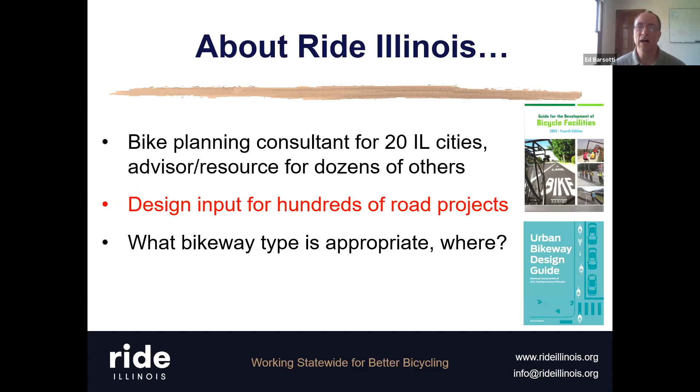So one of our specialties is determining what type of bikeway is appropriate where. That includes, when you're going to do a road project, how might bikes be accommodated? Some general thoughts on this webinar.

First of all, a lot of people who don't bike much will think about trails naturally - off-road trails on their own rights of way. When they think about biking, they think about trails, and it gets a lot of attention. But most biking still occurs on roadways, and that topic doesn't get as much attention. So that is, in fact, our members' number one priority: for us to try to fill that gap, work with agencies, work with consultants and so on to try to get our roads a little more bike-friendly.

So what this webinar will go through is our process of how we advocate for this, as well as maybe 15 or 16 different example requests covering a range of topics to show you what might be possible when you design your roadway project. We are meant to be a resource for towns, advocates, and consultants as well. Already I talked with 3 different attendees from last week about some projects they're working on, and I invite you to contact us after this one as well.

So the way we're going to do this - accommodating bikes in road designs - there are a couple of different factors. One is policy: is there a good policy in place? Is there a commitment by that agency to accommodate bikes and peds as well? And are there good details on the design standards? So how it is done is important as well.

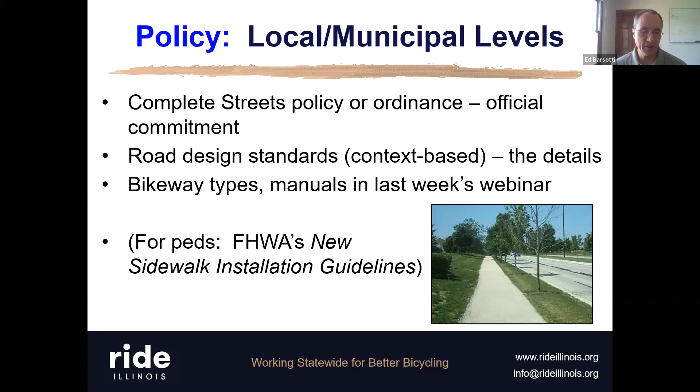And then I threw out a point for those interested in pedestrian issues. The Federal Highway Administration actually has a table called New Sidewalk Installation Guidelines, in which it recommends sidewalks on either one or two sides of the street, or just paved shoulders, depending on the context of a roadway. So I would recommend, if you're interested in that issue and you're with the town, to just Google FHWA's New Sidewalk Installation Guidelines and you'll find it.

Also at the local level, in addition to making a commitment and adopting roadway design standards, a couple of different policies include a bicycle or bike-ped plan that is meant to say we want to retrofit our community in this way. So a bike plan, which we'll discuss next week in a lot more detail, will indicate what roads are preferred for inclusion in a bike network in a town and how to go about doing that. Having an adopted bike plan also helps you win state and federal grants that are out there, and again we'll talk about grants next week as well.

Another policy that a town can do, which is separate from complete streets, is to have a separate budgetary line item for retrofits and for matching some of the grants that you might be able to get.

So an example is in Rockford. I'm currently finishing up a bike plan in Rockford where they have a complete streets policy in place. When a road project comes up, they automatically look at how they can improve things for bikes and peds. But at the same time, they recently bumped up a line item to $300,000 per year to go back to places in town that are not going to be where road projects occur in the next few years, but a retrofit needs to occur more quickly, earlier than that. Using this line item budget, they will go through and implement their bike plan, retrofitting those places that are not scheduled for improvement in the next few years.

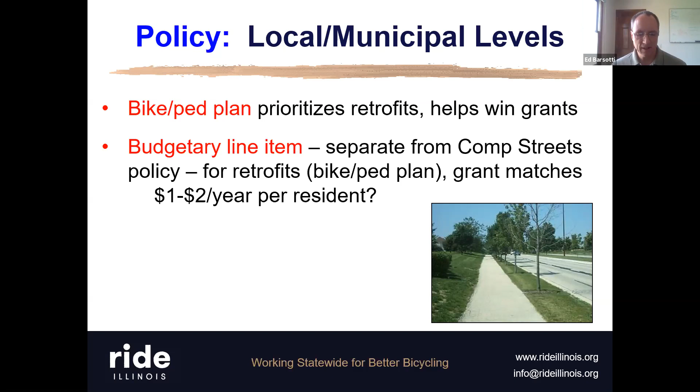My estimate on what's an appropriate amount for that line item is $1 to $2 per year per resident, and Rockford used the $2 per year per resident figure in getting their $300,000 total.

At the county DOT level, so many of the metro areas around Illinois, county roads are important for being able to get around, especially in suburban type development. We found that to be the case in several places around the state.

So back maybe 9 years ago, we did a survey of the different policies that the county DOTs have. Last year, we redid that survey for the Chicagoland counties only. What we found is that almost all of the counties are really in the last 15 years making progress on the issue of bike ped accommodation. They've adopted formal policies. They have one of their staff members look at each individual project with that perspective.

How can we accommodate bikes and peds? The counties that have adopted these policies, when there is an off-road accommodation, a sidewalk or a trail alongside of the road, that county will either pay some, most, or all of the cost for those off-road facilities. Will County, unfortunately, is the lone holdout on this topic, but we're seeing good progress around the state.

A few slides on the state level. IDOT has, for those who are advocates in particular and are not familiar, two different manuals that are really key to the accommodation policies. The Bureau of Design and Environment governs IDOT roadways, IDOT jurisdiction roadways. So when there's a state road project, they look at that manual, chapter 17, where you'll see a lot of the policies. I'll summarize those a bit in the next slides.

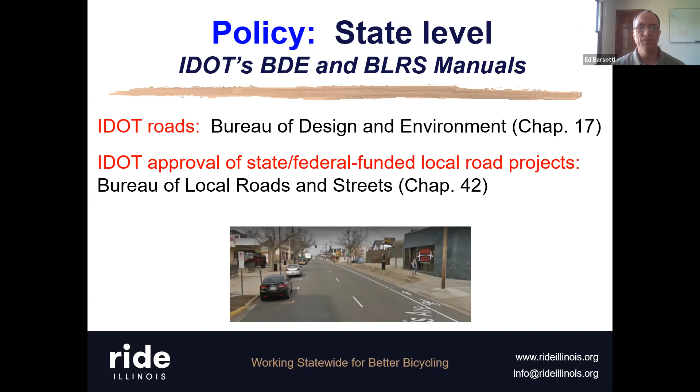Unfortunately, both of the manuals have badly lagged behind the national best practices and state of the art. But the good news is that, especially in the past year or so, they are catching up quite a bit. The BDE manual for state roads had their Chapter 17 entirely rewritten. Lots of great changes took effect last summer. And the BLRS manual, I'm actually on the committee that's rewriting the bike chapter for that, so hopefully that manual becomes more user-friendly, or more bike-friendly, within the next couple of months or so.

If you, as a town or as an advocate, come across times where IDOT may reject your suggestion or your design, it may be that what you're suggesting is already adopted by the Federal Highway Administration, but it just hasn't made its way into those IDOT manuals yet. In those cases, you can point to the federal manuals, the federal rules, and that should help you get your design approved.

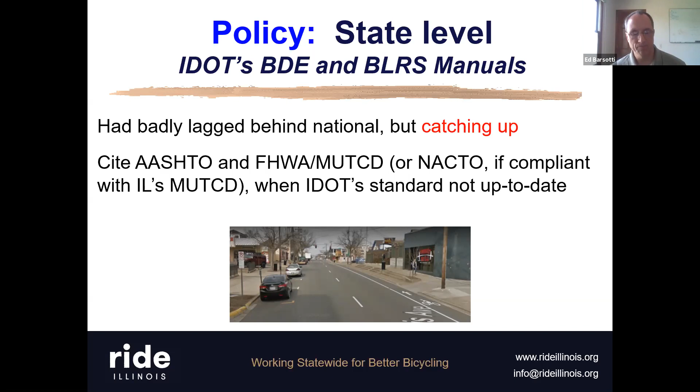So at the state level, for IDOT roads, back in 2007 there was a state complete streets law. That made its way into IDOT policy, IDOT design policy, in 2010. That law, that policy, is really only in effect for the major projects that IDOT does: a reconstruction of a roadway, an expansion, replacing a bridge, redoing an intersection. It's more than just your simple resurfacing projects.

The law focused on urban areas, but IDOT has actually expanded those policies to extend to other places around the state that meet certain warrants that they have. So maybe the main street in a rural town, the warrants will be met, and the complete streets policy that IDOT has will come into play.

Last year, as part of the rewrite of Chapter 17, IDOT adopted a new bikeway selection table, according to what is the speed, the traffic level, and so on. It used to be that table was primarily side paths, which is trails off the road, with bike lanes in a lot fewer situations. The new table has a lot more emphasis on on-road, but it does state that off-road side paths are an allowable option for most of these cases.

Something to be aware of in the IDOT policy is that if the primary recommendation can't be met, then the next highest and best is what can be implemented. Unfortunately, the policy doesn't include a lot of guidance on what that is. For example, when a side path couldn't be built, it was considered next highest and best simply to grade the grass next to the road level so a future trail could be added. There's a lot more that could be done in between those two extremes, and we'd be glad to work with anyone on that issue.

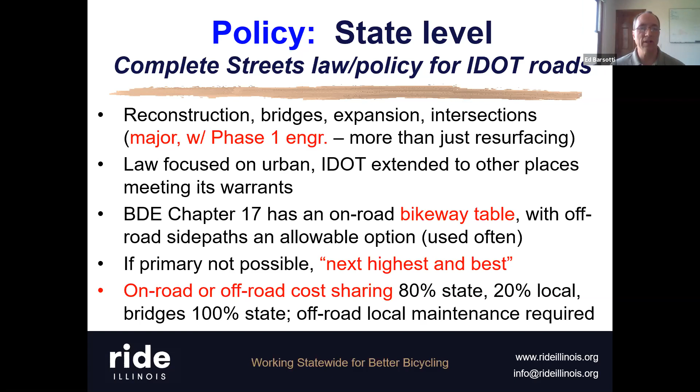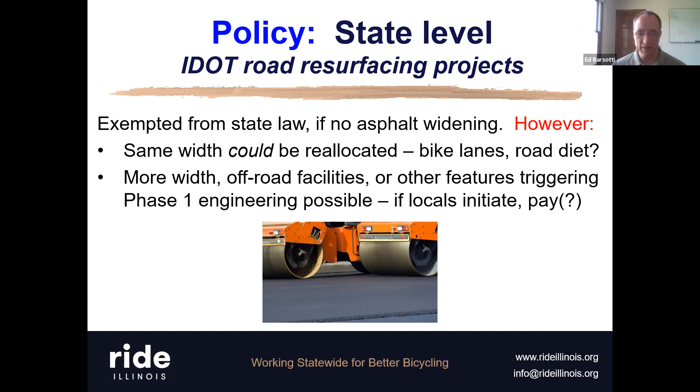Okay, so that's a quick look at the policy level. But even if you have a good policy at your town, county, or state, it's still important to get into the specifics for a particular location and roadway design that's coming up. That's something we've gotten involved with quite a bit.

First, we'll look at our retrofits—a separate project where we might hear from a local cyclist that there's a safety issue on a particular roadway. They'll let us know and ask if there's something we can do about it. If that's the case, we'll investigate: is something feasible for that location, and is it a justified request? We only want to make requests that we feel are reasonable.

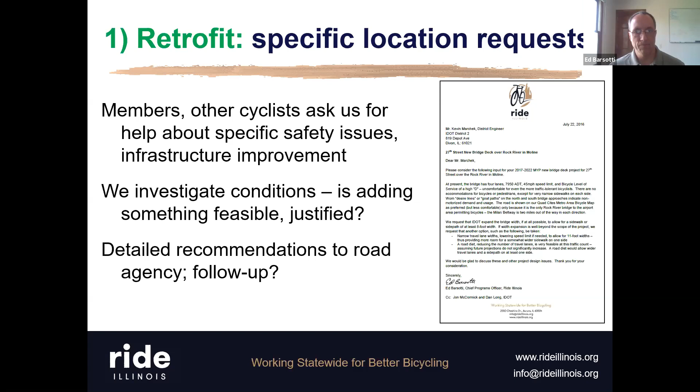If we find that it's something we want to request, we'll write up detailed recommendations to the road agency, and usually there's follow-up on that. I'd like to show you how we determine whether something rises to a priority level—some of the tools we use, which designers and advocates could also use to determine the need for accommodations.

The first tool, which I'll cover in the next couple of slides, is Strava, a phone app you can find online that shows a heat map of where cyclists ride. Additionally, there are traffic counts for motorized vehicular traffic, Google Map imagery to assess land use, local bike plans to see if a road is listed there but may not have come to the designer's attention, crash data, and local cyclist input. All of these factors help us decide whether a roadway makes sense for a request.

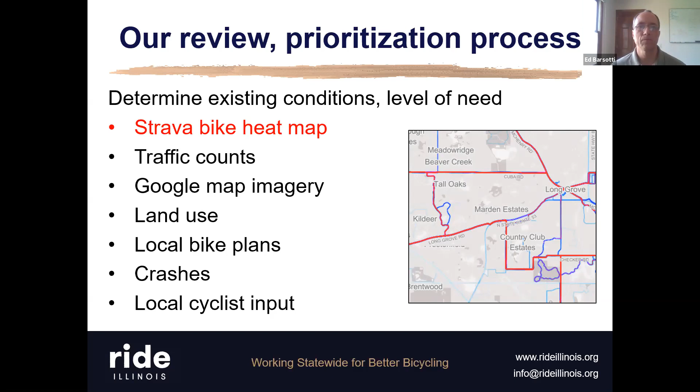So I mentioned Strava—it's a phone app that a subset of cyclists use to track their bike trips. On the website, you can look anywhere in the world to see where local cyclists ride. I use it when I travel to find good routes to check out a town, but as a planning tool it's very helpful to know where there's more demand. The online version is rough, but you can tell relative demand levels. If you want more detailed data—time of day, direction cyclists are going, exact counts—that can be purchased from Strava. I hear it's very expensive; I know Cook County has purchased it.

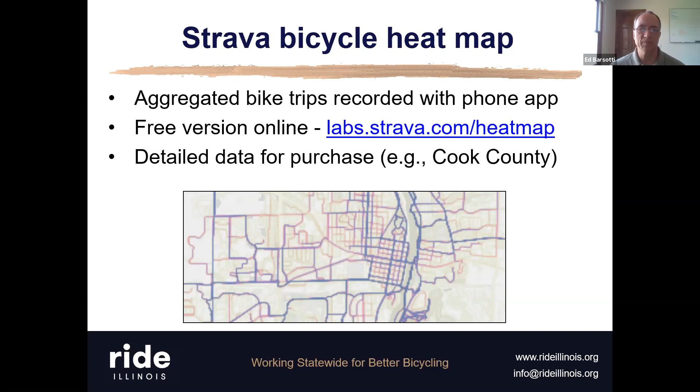Some of the pros and cons regarding Strava. Again, the free version is a relative level, so you're able to get a rough idea of what roads are more important than others for bikes. So when you don't have anything else to go on, Strava is a good first step.

Some of the negatives: it's primarily for your more club-level riders. People who are more casual cyclists, or who use their bike out of necessity to get to their jobs, usually aren't tracking their trips on Strava. So you get only a subset of the community, but it's still very helpful. Half of the trips Strava records are, in fact, commute trips, they have found. So it's a useful tool.

If I could interject real quick, I know several years back we requested access to some of the more detailed data. Because, as mentioned, Cook County had already purchased that data and had a contract with them, there wasn't going to be any additional cost. I was just reaching out as an advocate. I did go so far as to get access to the data, but at the time didn't really have anything to do with it.

So I believe if an umbrella jurisdiction you fall within has a contract, you could get access to it without additional cost. That's my impression too. I haven't spoken to Cook County about that exact issue, but my understanding is that if a certain geographic region has purchased the data and is using it, any of the towns within that county, for example, could use that data. Okay, thanks. Good question.

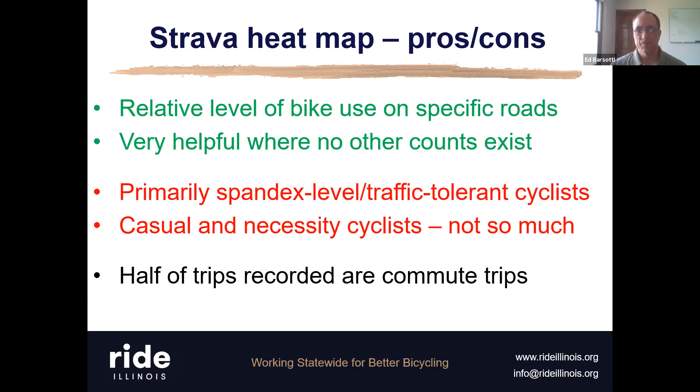So that was a little look at some of our process when we receive requests from local cyclists to do something about a bad location. The next section will take a look at our process of being more opportunistic, looking ahead at upcoming road projects. The reason we do that instead of simply looking at retrofits is that it's usually cheaper, often much cheaper, to make a request and a design change to accommodate bikes as part of a project that's already going to be done anyway.

So in that case, the ideal would be to have a complete streets policy and good standards in place. But again, you have a lot of location-specific context, so it makes sense to look at and provide specific input early in the process. That's really what we're trying to do.

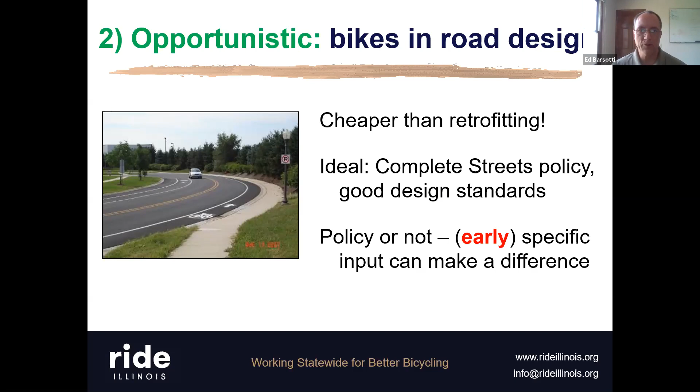For advocates listening, the sources where we can find that information: IDOT has an online map of their multi-year program, where you can find out what they're planning and roughly when, give or take a couple of years. Many counties will publish their upcoming road projects online. Several towns will also publish their capital improvement programs, where you'll find what roads will be resurfaced and reconstructed over the next year or more. And within metropolitan areas, there are documents called TIPs, where you can find some of that information for projects getting federal money.

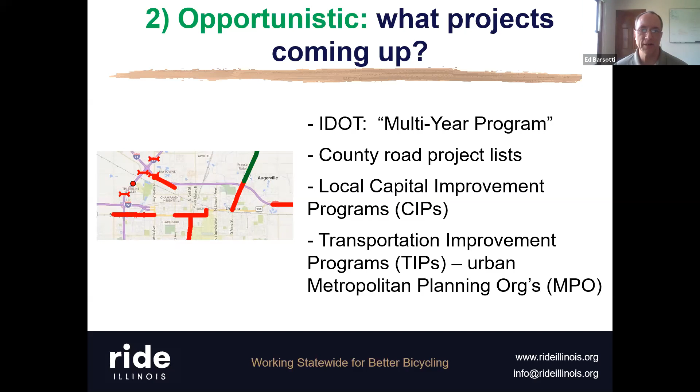I mentioned that when we make our request, we try to be very reasonable about it. For example, out in the suburbs, if there's a 45-mile-an-hour road and people are turning quickly at intersections, our request isn't going to be to tighten the turning radius to something you might see in downtown Chicago. We try to make ourselves aware of the various concerns and other issues in engineering and road design, and we look for ways of providing a win-win, where accommodation can be done without sacrificing the other factors engineers are trying to address.

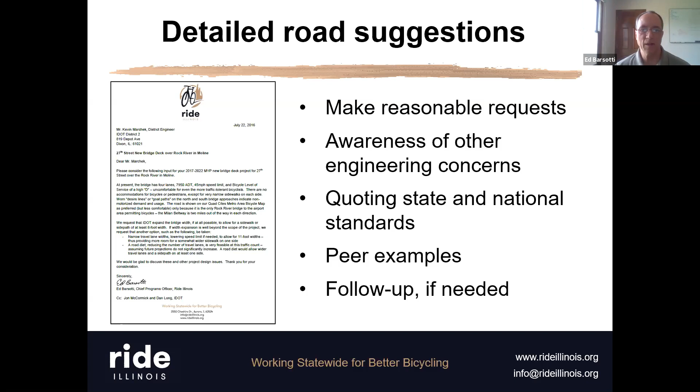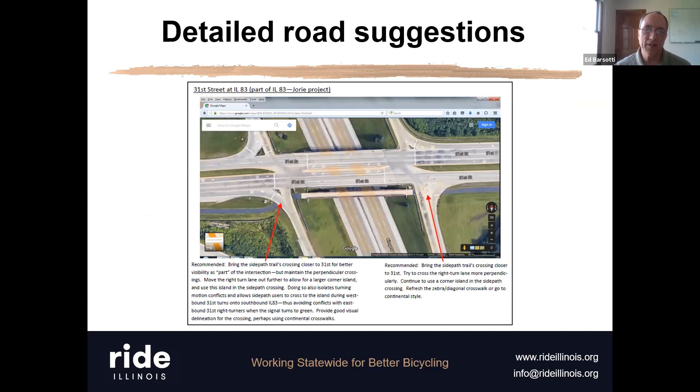Our suggestions will often quote state and national standards, the latter especially if it's a situation where IDOT's manuals haven't caught up with national standards yet. Sometimes in our suggestions we'll give examples of peers that have done exactly the same things, and we usually follow up to see what happened when that project was done. Sometimes, since a picture might be worth 1,000 words, we'll include an overhead of that location and describe what we think would help.

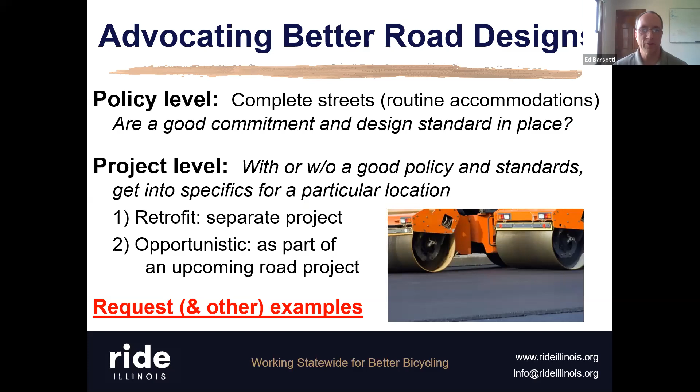So that's the second part of the presentation, where we've looked at policy. It's important to advocate for and adopt good policies, but it's also important to look at the project level, at the very specific details of that location, since a policy cannot possibly cover every scenario. Dave, are there any questions yet before we jump into the examples?

Just a comment here. Terry mentioned that the Strava heat map will also show places that cyclists will avoid, so that can be factored into decisions.

I'll follow up on that too. It's important to know that Strava is showing existing conditions, not necessarily latent demand. A road may not be getting as much use as it otherwise would simply because it's terrible, really hard to bike on. But lacking a good measure of latent demand, Strava might be a good starting point. You just have to keep that in mind.

I think that's it for now. All right, so we'll move on to the different requests that we make.

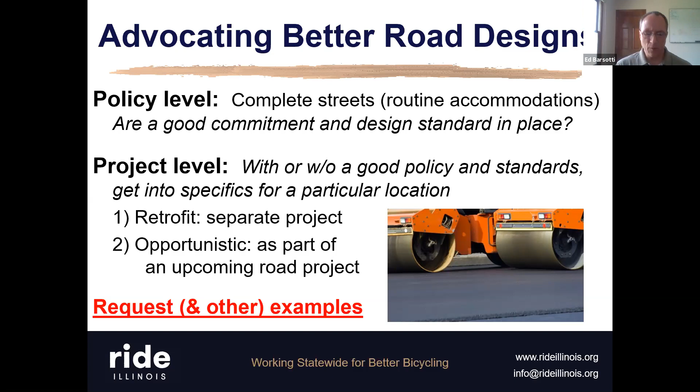Over the last couple of years, when we've worked on opportunistic road projects, we focused primarily on IDOT roadways, one by one for the 9 districts around the state. We took a look at their list of what they have coming up over 5 years, and we filtered it down, typically excluding Chicagoland District 1.

But for the other districts, typically we might have 10 to 18 projects that we have some input on. A lot of those end up being resurfacing projects and bridge replacements. That's really what's going on. Now that we have a capital bill and there's additional money, I think we're going to see perhaps more comprehensive projects and some additional types of projects going on.

For IDOT District 1, we focused on resurfacing projects. There were 215 within District 1 alone, and we sent in suggestions for about 140 of them, with follow-up meetings as well. So that's the context I'd like to convey before we look at roughly 15 or 16 different examples.

The examples I'll show will start off with on-road accommodation suggestions, and then we'll move on to some of the off-road things that we requested.

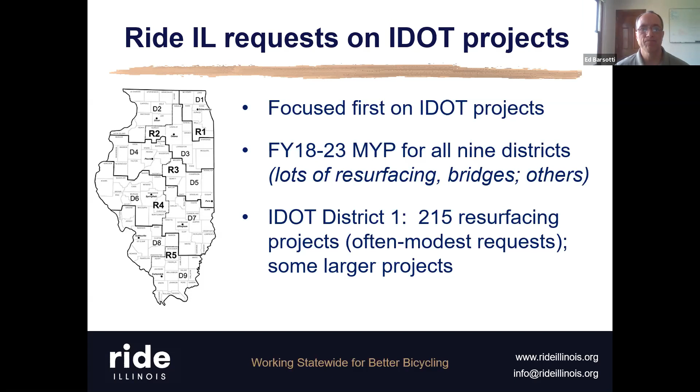So this one actually wasn't a request. This is something IDOT did, IDOT District 9 did on its own with the city of Carbondale.

Here's a roadway where you had a one-way US 51 through downtown Carbondale. It was 2 lanes, and there was quite a bit of extra width in those lanes, enough so that the lanes could be narrowed, still well above the minimums, leaving enough room for a bike lane on the right side of the road. So that's an easy one.

When we then did a bike plan in Carbondale, we made the same request for some of the other IDOT roads in that town.

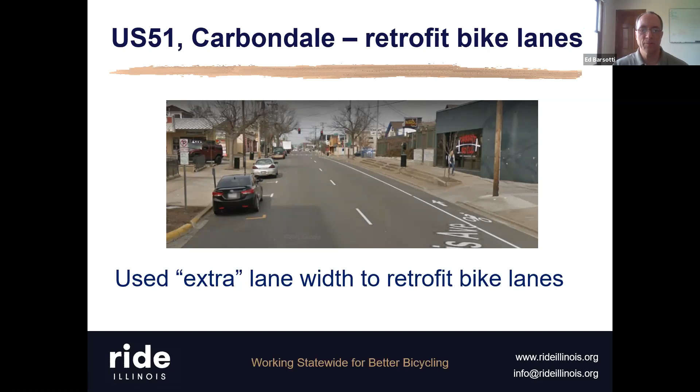Sometimes when you have bike lanes, you get to intersections and don't have enough width to carry that bike lane through because you have turn lanes. When you do have right turn lanes, something you could do is add shared lane markings on the left part of the exclusive right turn lane.

This is something fairly recent. I didn't cover it last week on the bikeway types because it was a relatively minor issue, but the FHWA did approve it, and it's on their MUTCD website of recently accepted updates. So that's one way of handling an intersection for bike lanes that we had requested in a couple of projects.

The NACTO Urban Bikeway Design Guide is a source for some other possible treatments that either we could ask for or that others could implement.

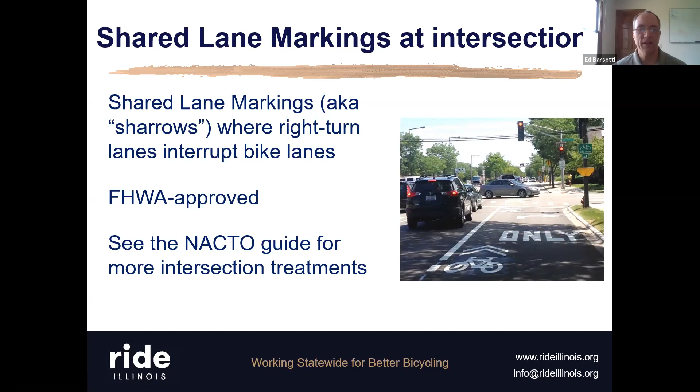An IDOT project that we looked at and made a request on was in Blue Island. We saw a 4-lane road that was really kind of overbuilt in a very residential area. 5,100 ADT is quite low for 4 lanes, it's very low.

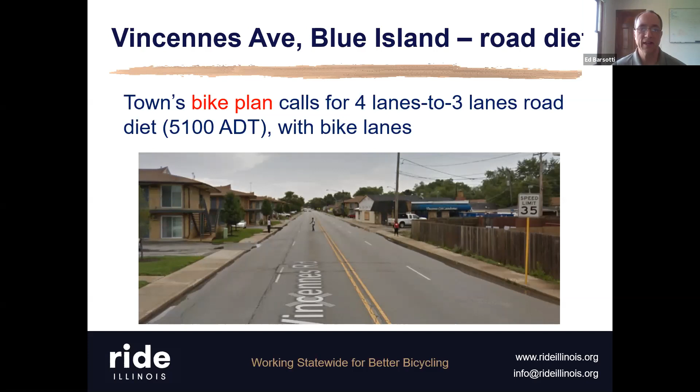So we looked at the town's bike plan and saw they had a recommendation for converting 4 lanes to 3 lanes on this resurfacing project. That is what we echoed in our request, because we don't know if that bike plan made its way into the design process. We wanted to call attention to it.

A couple more slides on road diets. This is what I mean by it. It was discussed last week a little bit.

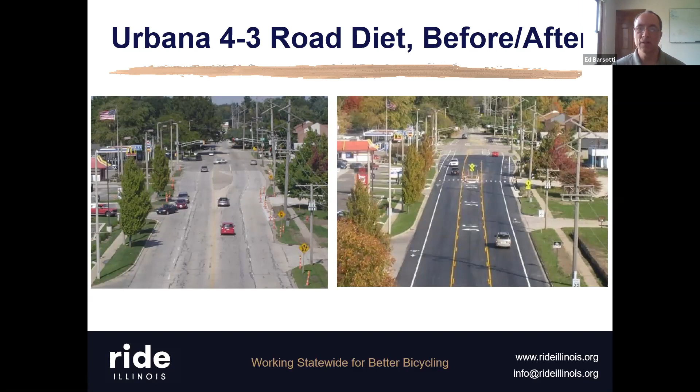Here's an example in Urbana where a 4-lane road was converted to 3 lanes. That 3 lanes had enough width left over for a center turn lane with median, and there was enough room for bike lanes on both sides. So that's a case where the road was not widened. It was simply, when they resurfaced it and had to put the stripes on anyway, reconfigured to allow for bike lanes and this road diet.

Another road diet suggestion we made involved looking at Strava. Here's a place in Western Springs that we noticed was kind of like the Panama Canal for bicyclists—getting over the Tri-State Tollway there is pretty tough, and there aren't many options, but 47th Street is used heavily. We noticed that on one end the road was 2 lanes, and from a certain point on it was 4 lanes, including the bridge. Most bicyclists turned north onto local roads rather than stay on this IDOT road. So our request was to look at doing a road diet for this section. The traffic counts seem to allow for that possibility, subject to an intersection and traffic study to see if you could feasibly go down to 3 lanes. That was our recommendation given how much bike traffic we saw.

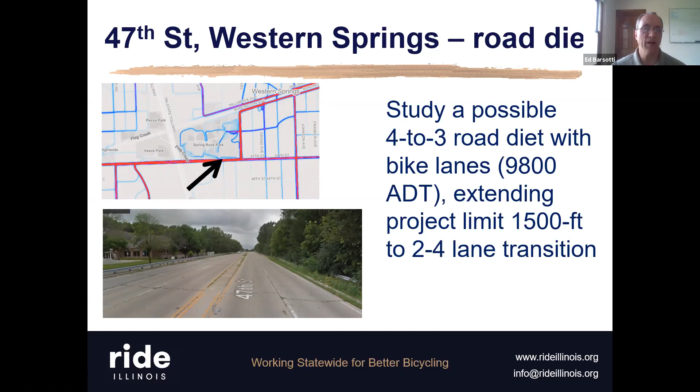Here's one a little more rural, in Will County and Wilmington. What we noticed with Strava was that there were a couple of quiet country roads that people ride on—not a ton, but a moderate amount. Unfortunately those roads didn't connect; there was a 400-foot section of Illinois 102 people had to ride on, which is considerably busier. We looked at the Google imagery and saw there were stone shoulders there, so we asked that those stone shoulders be paved for just that 400-foot segment connecting the two roads.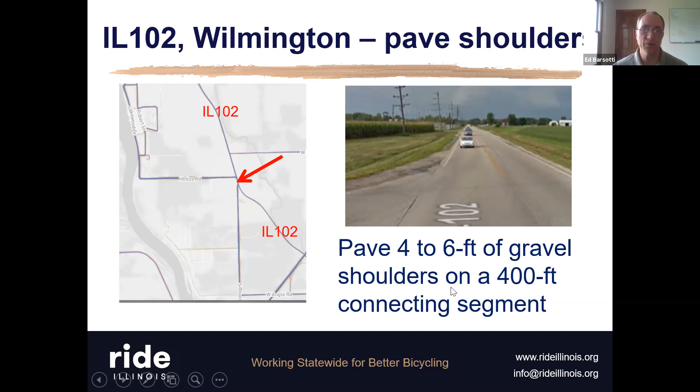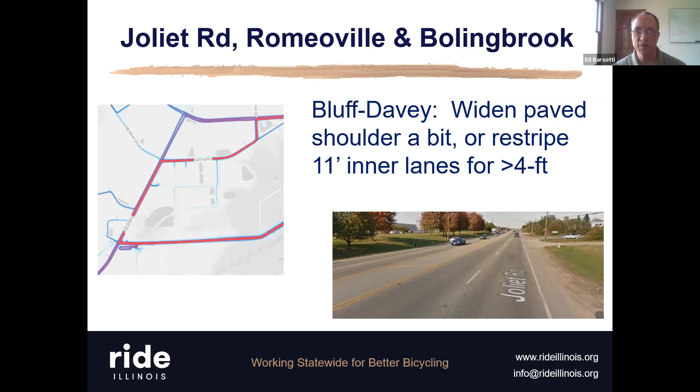Along those same lines, we noticed in Romeoville and Bolingbrook that Joliet Road was heavily used by cyclists. Bluff Road is up here and is a very popular bike route, but people were using Joliet Road for a short connecting part. We saw the current roadway has maybe 2 to 3 feet of shoulder plus additional stone shoulder beside that, so our recommendation was to try to widen that shoulder. Two possible ways: narrow the inner lanes to 11 feet—since you don't have as much truck traffic there, going below 12 feet is very possible—which would give more room for the shoulder, or add some additional pavement. Those were a couple of suggestions to eke out a little more shoulder space.

Similarly, in North Chicago we noticed a road that was 6 lanes, very busy, with no off-road accommodations—12-foot lanes, three on each side. We still noticed it was fairly popular with cyclists, so our conclusion was that these were most likely club-level cyclists who are more traffic tolerant and may not need as high a level of accommodation as casual cyclists would. Our thought was, if you don't want to widen the road but are resurfacing it, make the 2 inner lanes on each side 11 feet, allowing 14 feet for the rightmost lane. That 14 feet is the width needed for a vehicle to pass a bike while maintaining at least 3 feet of clearance, which is the state law. So just by moving the lane widths, at no additional cost to the project, there could be some accommodation for the more advanced cyclists already using this roadway.

We have a question here from Matt Weiss, asking if there's a good resource for finding rural bike routes. I was typing back that the IDOT bike maps do rate roads based on safety and comfort. Matt, I'm guessing you're looking for something online that documents roads with wide shoulders or wide lanes.

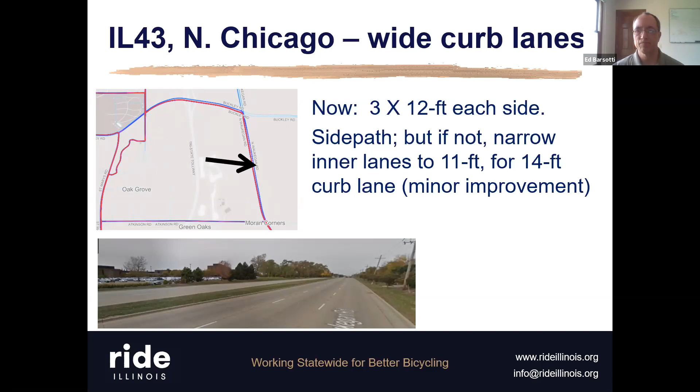And then a comment here real quick from Michael. So there's a proposed pedestrian bike bridge being added at 47th Street over 294 as part of that corridor reconstruction project. I did not know that. That's good to hear, that's certainly much more than a resurfacing.

So another example that we've requested on IDOT roads, but a whole lot of local roads as well. Many times there are roads that you just don't have the ability to widen, but it's a very popular bike route. Your options are very limited given the budget and other considerations. So on those roads, at least something that can be done is to raise the motorist awareness level that this is a popular bike route.

This particular sign is one that we have worked with IDOT to get approved and use, and probably maybe 15 or so local agencies at this point. So this isn't going to improve the comfort level that much, but it will raise awareness, and it is something that IDOT will allow.

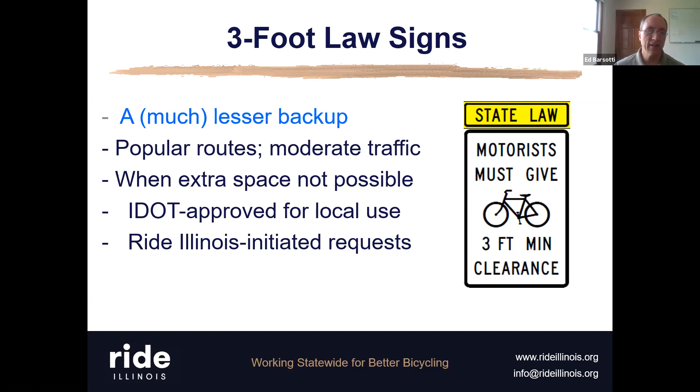A couple more examples on roadways. This is one in Willow Springs, Illinois 171. Kind of hard to see, but let's see if I have my cursor here. Along the edges here, you'll see that there are rumble strips. Rumble strips are meant to prevent run-off-the-road crashes. The rumble strips are fairly wide, and there's not much room between the rumble and the edge of the pavement.

Turns out that at this location there is a trail, the Centennial or the I&M Canal Trail probably, I don't know, 100, 200 yards to the right of where we're looking here. But unfortunately, that trail does not provide access to a couple of key roads that intersect with this Illinois 171. So we saw in Strava that people are in fact biking on Archer, even though there's a trail not too far away, because they had to get to those roads.

That brought our attention to the rumble strips being bad, that there's no way to cross over them, there's no gaps in the rumble strips, and there's not enough room to the right of them. So cyclists who do use this road will be biking in the lane, which will be confusing to a lot of drivers, thinking they should just move over into the shoulder.

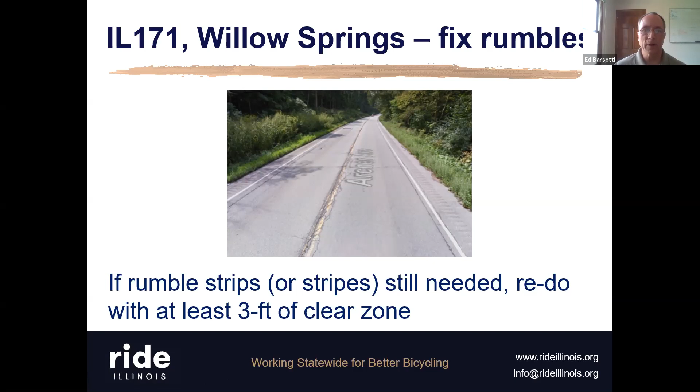So on this particular road, our request was that when you do repave the road, including the shoulder, that you use IDOT's new, or fairly new, rumble strip design that is more bike friendly. It's not bike friendly in that you can ride over them, you cannot, but the rumble strips are narrower and it provides more room to the right of the rumbles.

Now, a problem that we have with this IDOT design is that it does not specify that you need to have at least 3 or even 4 feet to the right of the rumbles. So that's something we're kind of struggling with them on. But if you are in a position of designing a roadway, you can look at this particular design standard to narrow the width of the rumbles and maximize the amount of clear zone to the right where cyclists can ride.

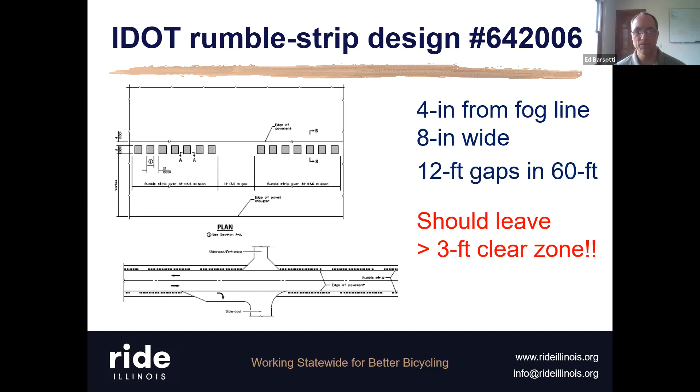Something that comes up in town after town where I've done bike plans is: I'm riding my bike and I'm on a quiet road. I get to a stoplight at a major road and I'm not able to trigger a green light. And the cars that come after me, I'm first in line. The cars that come in back of me think they're being polite by staying way far back. Well, then no one triggers the green and we're just sitting there.

There's actually a state law about that. If a bike is unable to trigger a green after 2 minutes, they can treat it like a stop sign, which isn't very cool. I think an engineering solution is better. But this is an issue that comes up a lot.

Some agencies rely on pedestrian push buttons, which are off the road. But what that requires you to do as a cyclist is get over to the side, lift your bike over the curb, walk your bike through the grass, push the button, come back, and hopefully get onto the road well positioned before it turns green. So it could be kind of a dangerous situation.

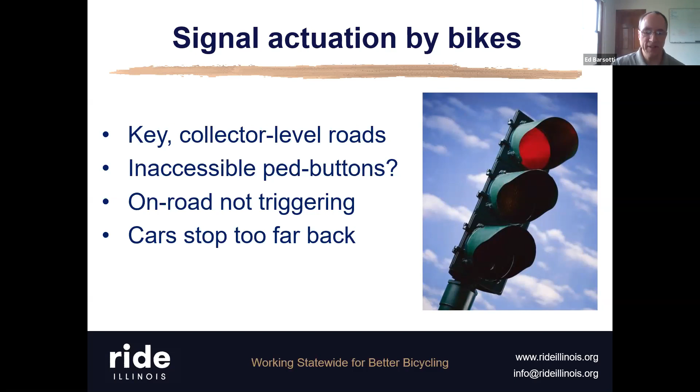There are solutions to this, which we've included in many of the requests that we've made. If it's a new stoplight or a newly reconstructed intersection, there are better loop types that are more sensitive to bikes and motorcycles. Or it might simply be a matter of tuning the amplifiers in your detectors and marking for bikes and motorcycles where to position to trigger that green.

We just did exactly that with Effingham. They were getting back from BLRS that they had to install detector loops on roads where they wanted to install bike lanes. But we said, why don't you take a look at adjusting it, testing with a bike on the sweet spot of the detector to see if you're able to trigger a green. They were able to do that without the extra expense of installing dedicated detectors just for bikes. So there are ways to handle this issue. It's a lot bigger issue than people give thought to, and we'd be glad to help.

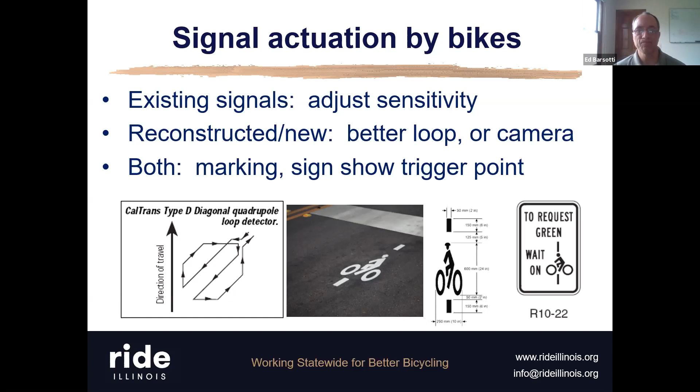All right, so now we're moving to the off-road section, some different options there. This is much more than just a resurfacing project. If you're adding sidewalks or a side path trail, it adds a lot to the project. But still, we have made those requests, and usually, if it's an IDOT road, it requires that the local agency be the one initiating the off-road facility request.

So on many roads, what you'll see are what are called goat paths or desire lines—worn paths of dirt where people do walk or bike. That's a good indication that there's quite a bit of demand for pedestrians and bikes to have some sort of facility there. When we see that in our investigation, it raises our priority in making the request for a side path or even a sidewalk.

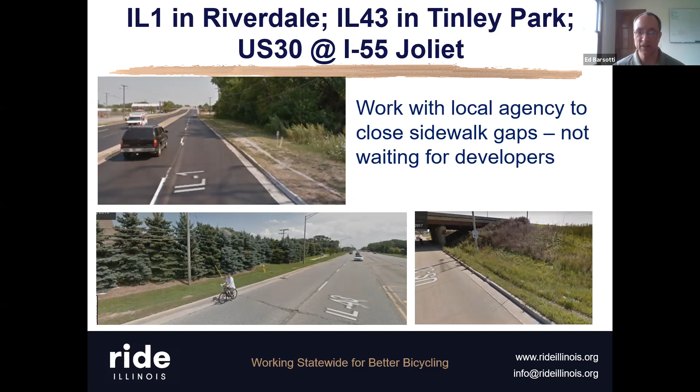Here's one that we saw that was a context issue. This is the Cal-Sag Trail, installed several years ago in Palos Park at an intersection. We saw a ton of usage of that trail, but right over here happens to be the subway. I experienced this with my wife personally—getting there became a lot more difficult. There was no curb cuts, no crosswalks, no ramps on this island. So when this project came up for resurfacing, we included in our request the addition of those features to allow for better access to the destinations in this strip mall.

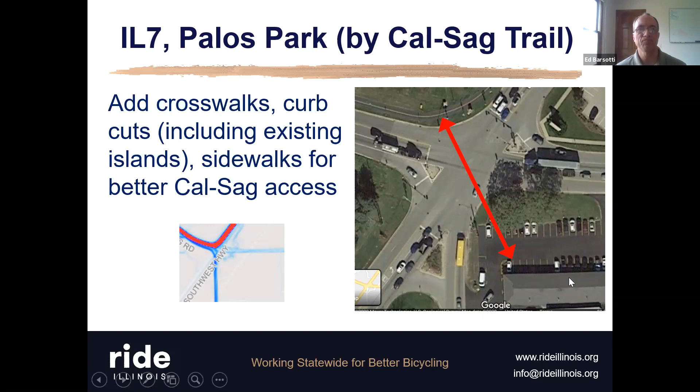Here's one that we see occasionally. I do not understand this trend of not connecting sidewalks to the other side of the road, just having it be parcel-based. This trend is growing, and it's just bad, really bad. So when we see that, we certainly request that the connections be made so that people biking off-road along this busy road can get to the other side.

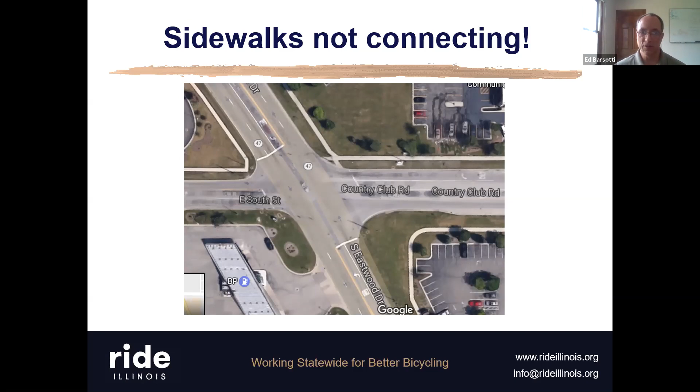Another thing we point out in our letters is that the standard seems to be, when you have a right-of-way for a roadway, you put the sidewalk at the back of the right-of-way, at the very edges. While that's great mid-block, when you get to intersections it becomes a big problem. Look at this one, for example. If someone's walking or biking here, what do you think the chances are that the car is going to stop at this stop line? They're not going to be able to see anything. It's slim to none, probably less than 2%.

So in our request in this situation, we ask that the sidewalk crossing be brought closer to the parallel road so that off-road users are better seen in the intersection dynamics.

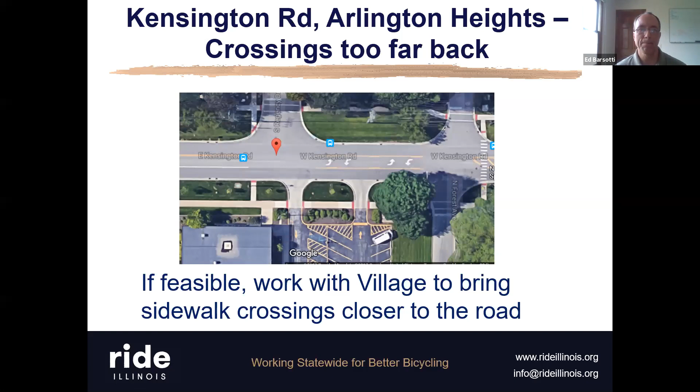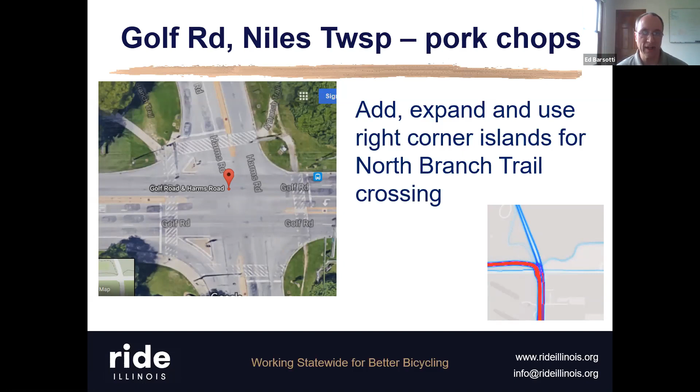A couple of slides regarding trails crossing major intersections. Here's one where, if you look carefully, there are a couple of small right corner islands separating the right turners from the through traffic, but those islands are small enough that they're not used as part of the crosswalk for the trail. Our recommendation was, if you're going to reconstruct the intersection, expand it a little more so you can build a larger corner island and use that to break up the crossing for trail users.

Here's a good example of that being done as it was designed. I showed this one last week. This is on the west side of Aurora at the intersection of Orchard and Galena, where the side path trail uses the corner island. The corner islands are recessed so that left turning trucks do not hit it. It does require some more room, but it improves safety, improves stop line compliance, and it's something that we as an organization recommend as a way to make things safer for bikes and peds without compromising the intersection LOS goals of road designers.

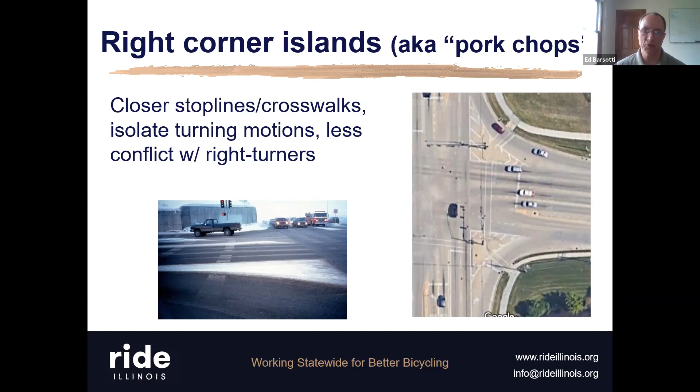Similar to that, a trail crossing in Tinley Park, where creating the right corner islands may or may not be possible. In that situation, our recommendation was to use a lead pedestrian interval. You push the ped button, and as a trail user you get a green light a couple seconds before right-turning and straight-ahead traffic does. It's a way of avoiding conflicts when the light turns green.

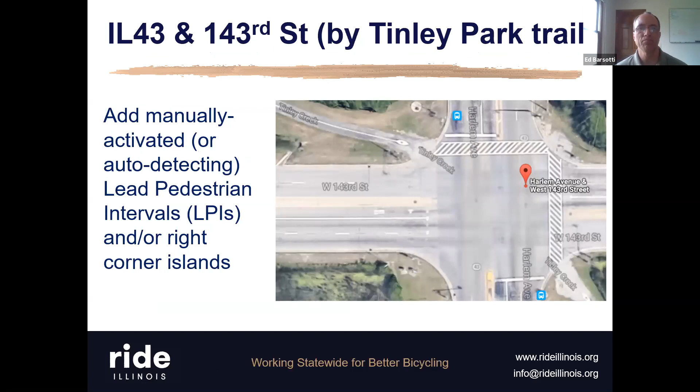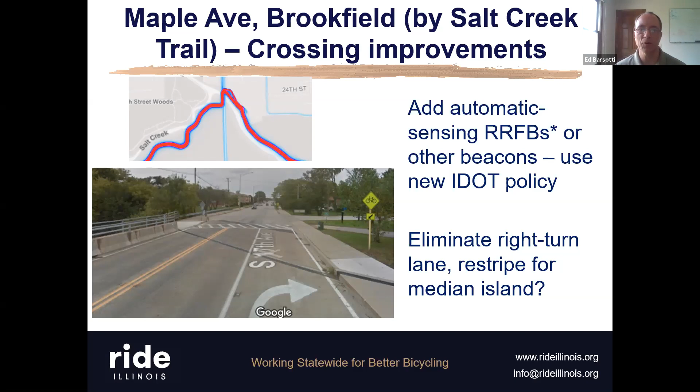That was a lot of information with a lot of different examples, but the point is that an upcoming road project, whether a simple resurfacing or something larger, is an opportunity to improve conditions for cyclists and pedestrians. As an organization, we're here to help, whether you're an advocate, a town, or a consultant working for a town. Thank you very much.